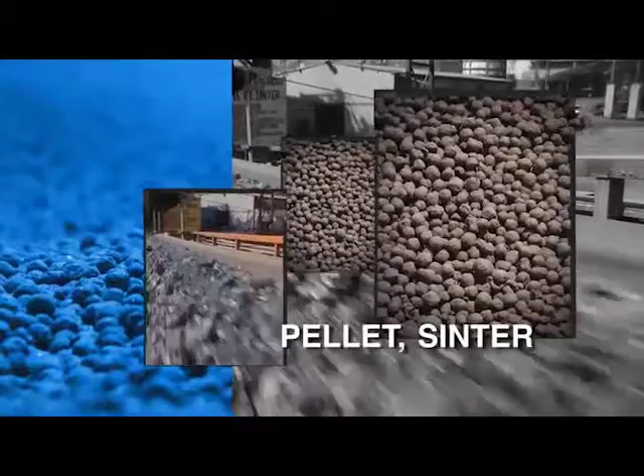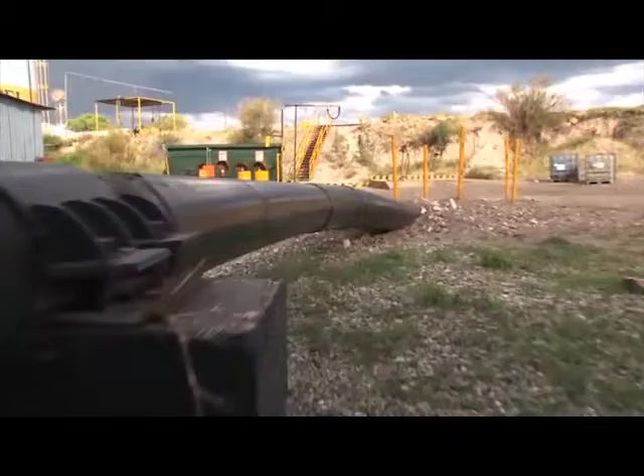At the beginning of the steelworking process, the mineral ore is treated by pelletization and sinterization, while the coal is processed by coking. Coming from Hercules and the Coahuilan Desert, iron reaches the pelletizing plant as a sludge through a duct 14 inches in diameter and 180 miles long. This sludge is subjected to filtration.

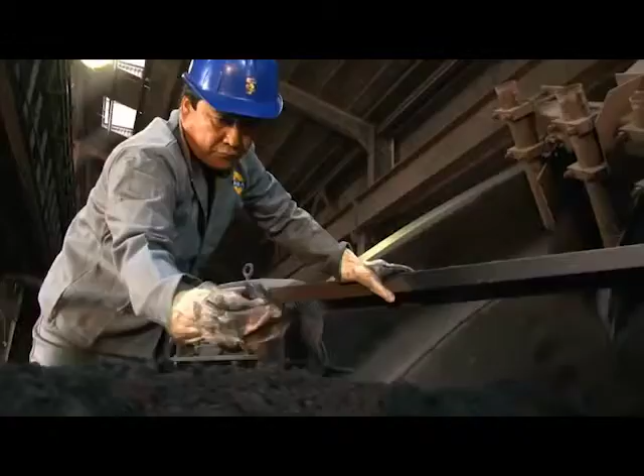The water is recovered and the dry ore is sent to pelletizer discs to be mixed with binding agents to form small balls called pellets. At 1,300 degrees Celsius, the pellets are heat hardened before being sent to blast furnaces.

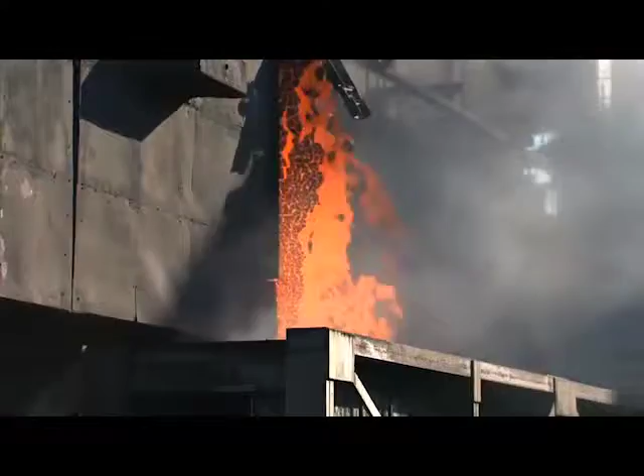Meanwhile, the coking plants receive metallurgical coal by rail from the Carboniferous region of Coahuila and treat it in vertical ovens lined with refractory brick. Through 18 hours of baking, the coal is transformed to coke, the basic fuel for the blast furnaces that produce pig iron or first fusion iron.

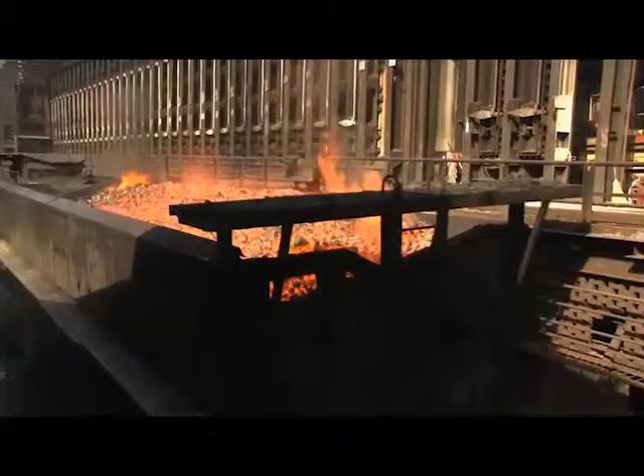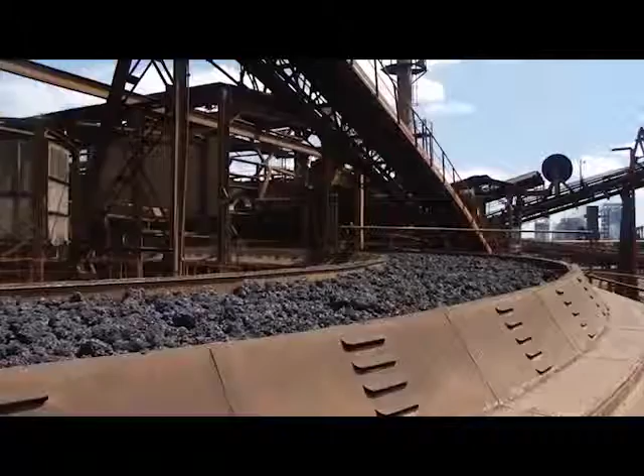During this process, various byproducts are obtained, among them coke oven gas, a fuel used in later stages of the steelmaking process. Another raw material for the blast furnaces is sinter, a porous mass composed of iron ore, flakes, and powder produced by the steelmaking process itself. Blending with lime, coke fines, and dolomite produces a mix that is hardened in the continuous chain oven of the sinter plant.

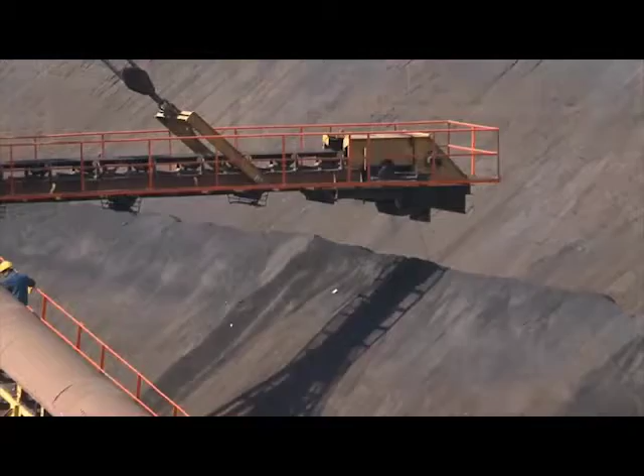Processed iron and coal, the basic raw materials for producing pig iron, are sent to blast furnaces consisting primarily of a large cylindrical structure over 160 feet high whose interior is lined with refractory brick. In the blast furnace, the iron oxides contained in the pellets and sinter, which are stored in a hopper's facility, along with limestone, dolomite, and coke, are reduced and converted to pig iron.

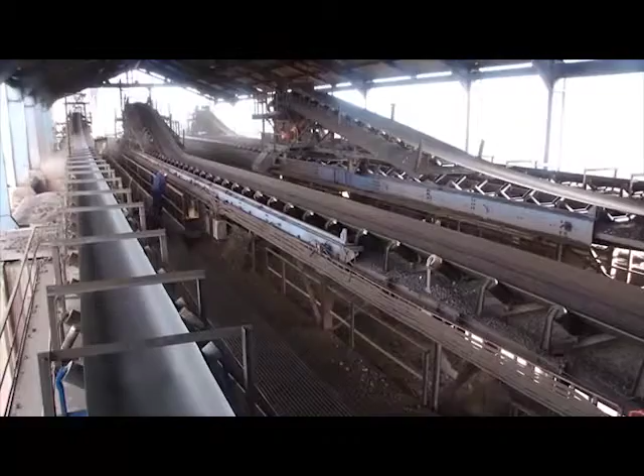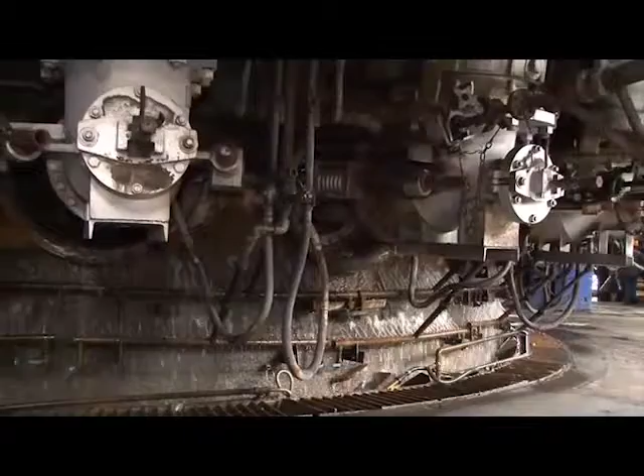Mixed in the proper amounts, these raw materials produce layers of various thicknesses when they are deposited in the blast furnaces through the charging system located on the top. Hot air is introduced under pressure into the bottom of the furnace, blasting the coke and smelting the iron ore in an environment of up to 1,650 degrees Celsius.

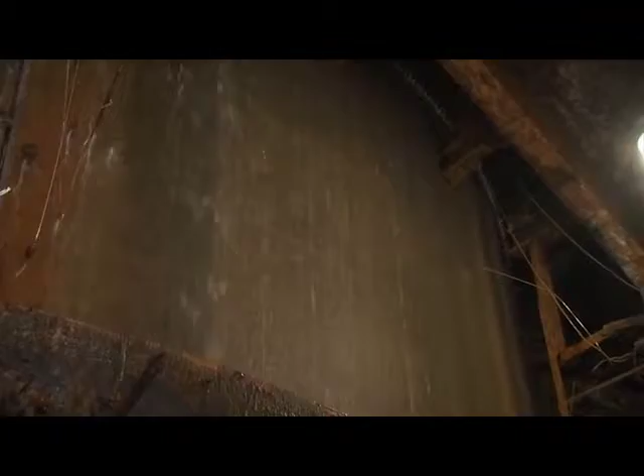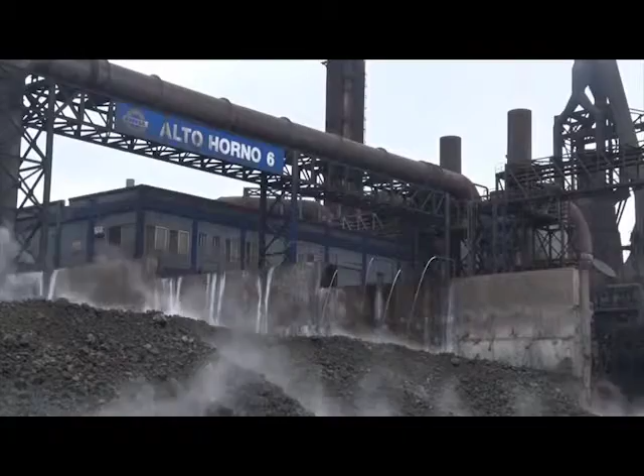In the lower part of the furnace, a graphite hearth or crucible receives the molten metal, which then is drained through tap holes and troughs and emptied into 200 metric ton capacity torpedo cars. In order to eliminate sulfur content, reagents such as calcium carbide and magnesium are applied to the pig iron in the desulfurization plant. The slag generated during the smelting is deposited in a slag pit to be cooled with water. It is later stored or sold as a byproduct.

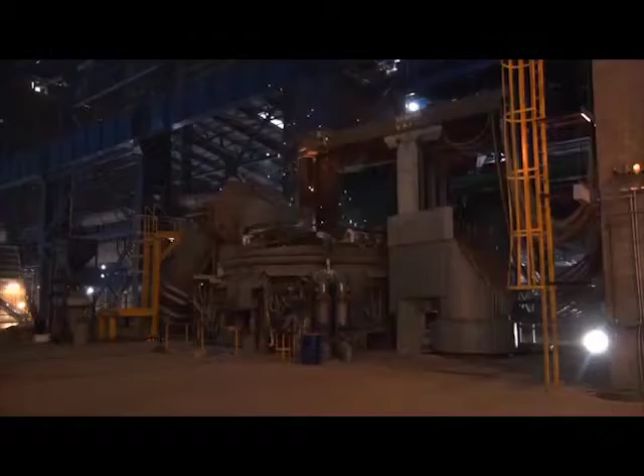For the conversion of pig iron to steel, AMSA uses the oxygen-based technique of steelmaking called BOF, Basic Oxygen Furnace, as well as an electric arc furnace. BOF steelmaking begins by loading scrap metal into the converters, pear-shaped furnaces with capacities of up to 150 metric tons lined internally with refractory brick.

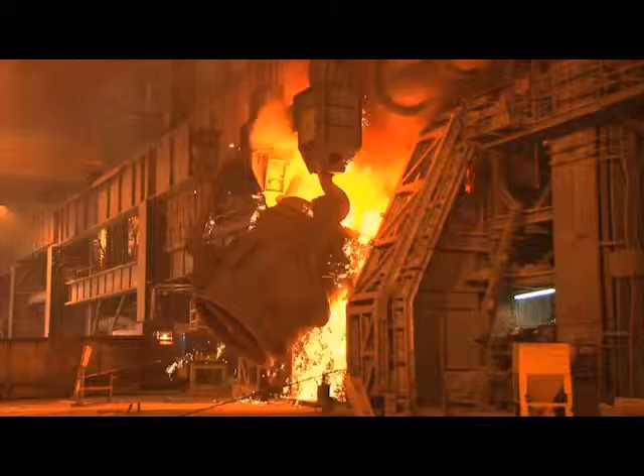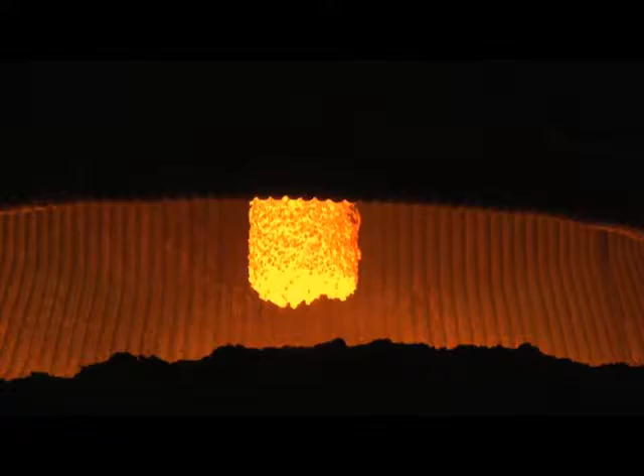When the proper amount of scrap metal has been loaded into the converter, molten pig iron is added by means of large ladles operated by traveling cranes. For refining, oxygen, argon, and nitrogen are injected into the mix under pressure through tubes known as lances connected at the top and bottom of the converter. After a period averaging 45 minutes, liquid steel is obtained.

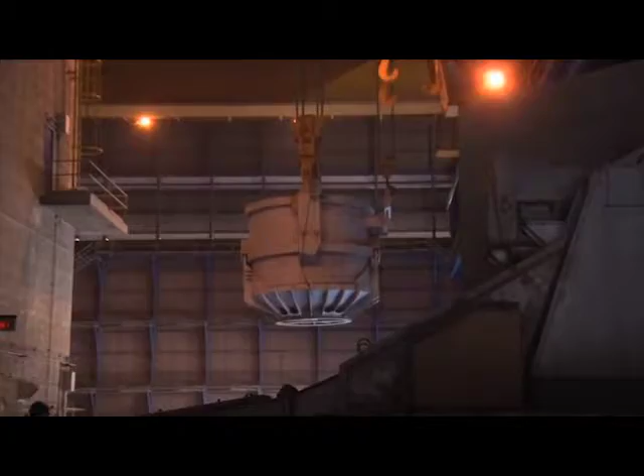The steel is poured into large ladles and ferroalloys are added in order to adjust its chemical makeup to match the requirements of the material ordered by our clients. Production of liquid steel by means of the electric arc furnace is conducted by beginning with a mixture of scrap metal, iron briquettes, or liquid pig iron at a rate of 150 metric tons per casting.

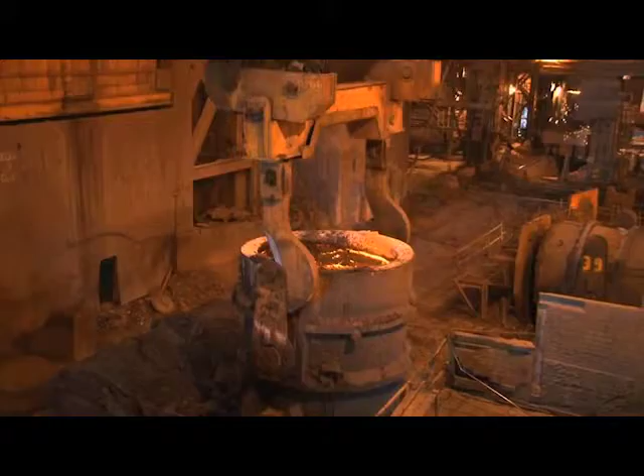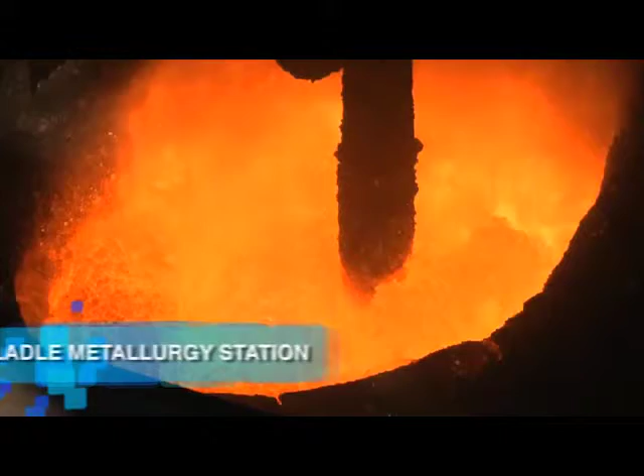Scrap and briquettes are loaded by using baskets, while the pig iron is transported by a gutter to the furnace, where 3 graphite electrodes apply 140 megavolt-amperes of electric energy to melt the load and produce steel, which is emptied into special ladles. In order to produce specific properties, the liquid steel from both systems goes to the secondary treatment station, secondary metallurgy, ladle metallurgy, or chemical reheating. Likewise, liquid steel can be processed in the dual degassing station to reduce the content of hydrogen and carbon for applications with higher requirements.

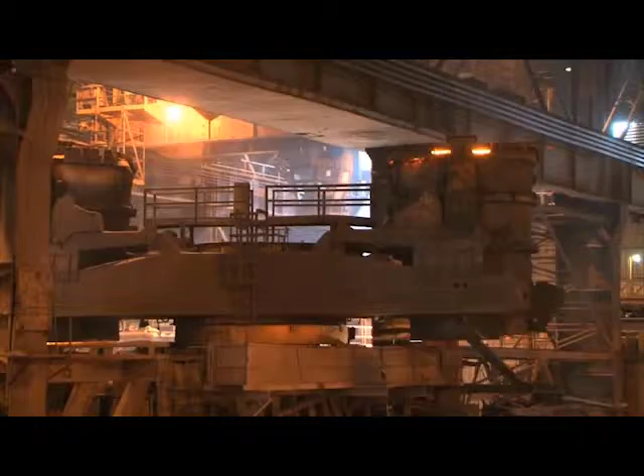With the treatment completed, liquid steel is transformed into slab on equipment called continuous casting machines. In this process, as it passes through a series of rollers with a cooling system, it begins to solidify until it becomes a slab which is cut with oxygas to the required dimensions. The steel slabs are produced in different thicknesses, widths, lengths, and weights, and each piece is labeled for later processing by hot rolling.

The hot rolling department, considered the backbone of AMSA operations, has a hot strip line which produces steel strip coils and 2 plate lines to produce steel plates in sheets or coils. On both lines, the slab is reheated to 1,330 degrees Celsius.

Plate line 1 has 2 reversing mills that in a series of passes generate wide plate in the required thickness and width. On plate line 2, the 8-inch slab is laminated in the reversible Steckel mill and the steel strip is temporarily stored in closed box furnaces to maintain temperatures above 1,000 degrees Celsius. Subsequently, an edger mill reduces the width of the strip to produce plate in sheet or coil.

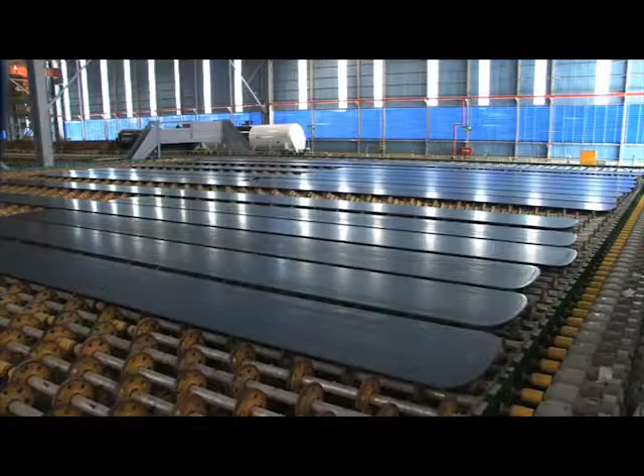If required, the plate goes to the normalizing line, where through thermal treatment a uniform granular structure and greater toughness of the steel is obtained. AMSA is the only manufacturer in Mexico that produces steel plate, which is used for making farming and mining machinery, oil industry machinery, as well as heavy automotive and railway products.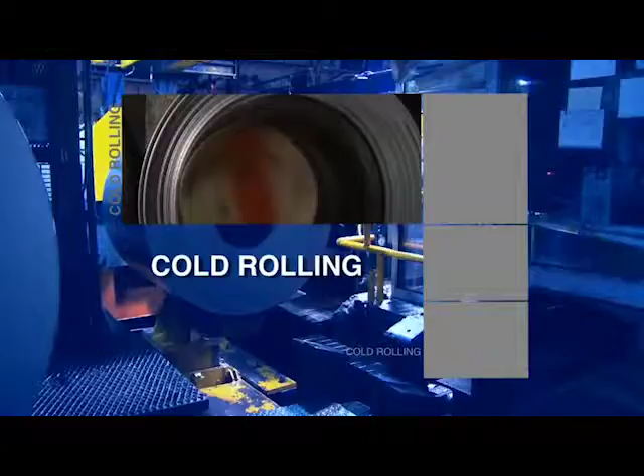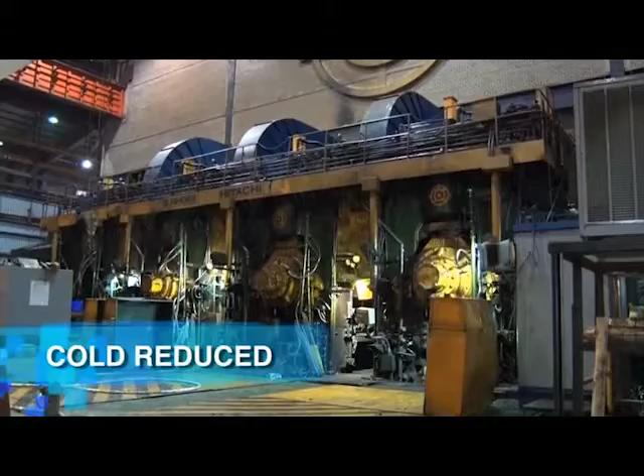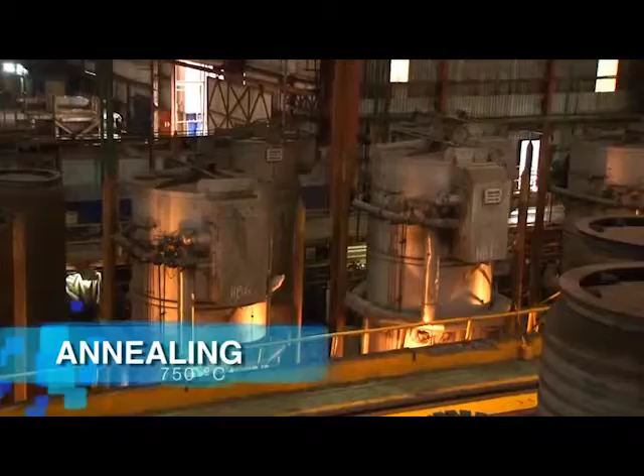Through cold rolling, the thickness of the sheet is reduced, while at the same time modifying and enhancing its physical properties. The process begins with pickling in order to eliminate oxides through the use of a hydrochloric acid-based solution. Then the strip is rolled at room temperature in various mills in order to gradually reduce its thickness and achieve the desired specifications. In order to soften the material, the coil is annealed in a continuous heating oven at temperatures of up to 750 degrees Celsius. The steel strip then goes to the tempering mills, which give it a greater surface quality and the specified hardness required for the various applications.

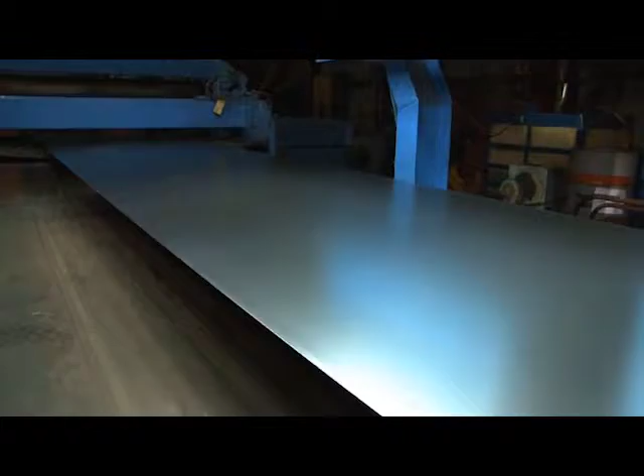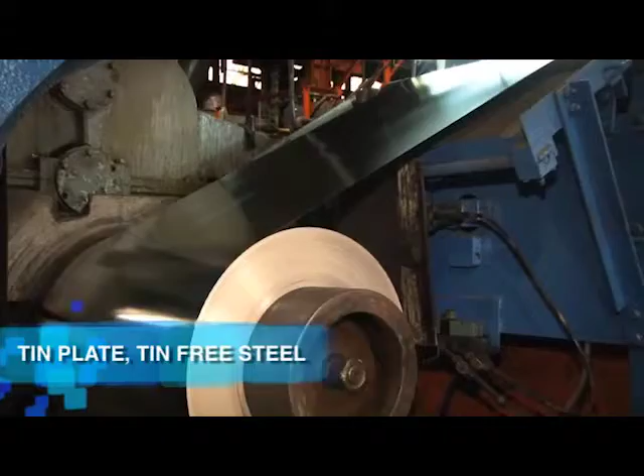In addition, AMSA has skin pass and tension leveling lines which improve the surface quality of the hot-rolled and cold-rolled coil respectively. In these units, a greater thickness uniformity is achieved, which is an essential requirement for manufacturers in the automotive industry, home appliances, and electrical steel. Furthermore, AMSA produces tin plate and tin-free steel, which are steels produced primarily for manufacturing of metal containers. In both cases, the cold-rolled coil is subjected to an electrolyte bath with tin and chrome, respectively.

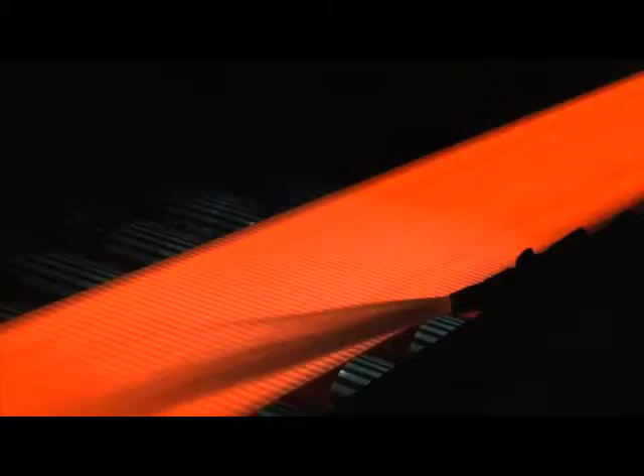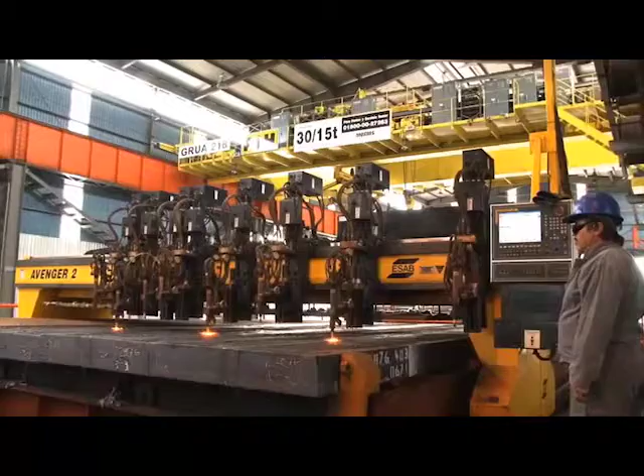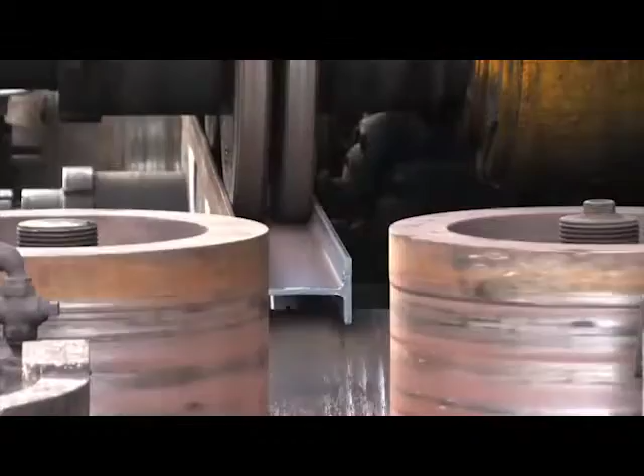In addition to the hot rolling and cold rolling lines, there is a department of structural shapes. AMSA is the primary domestic manufacturer of structural steel for the construction industry. Production begins with the cutting of the steel slab into square pieces called blooms. Reheated in an oven at over 1,250 degrees Celsius, the blooms go through various rolling mill trains to produce structural shapes such as W shapes, C shapes, and angled L shapes.